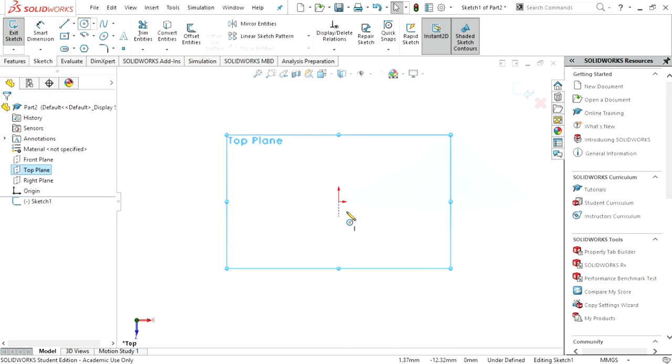So we go here, make sure it is in millimeter. Top plane. Let's start off with a circle first. Go dimension. So that is 56 millimeters.

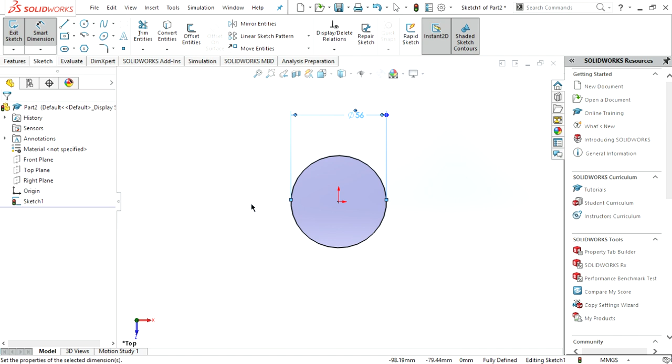56. Oops, never mind, it's not 56, that's just hole. So the whole thing is 75 millimeters. Sorry, 75. 75.

Okay, and then we're going to extrude. Extrude 75. There we go.

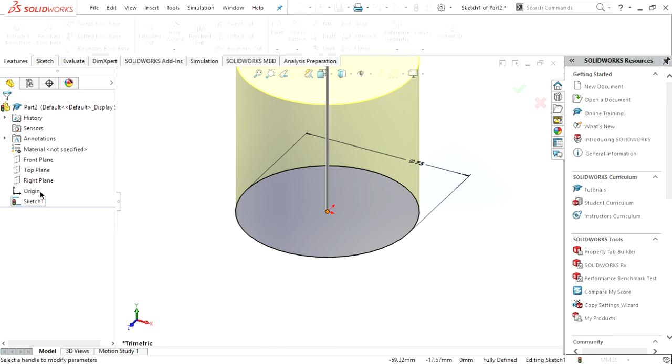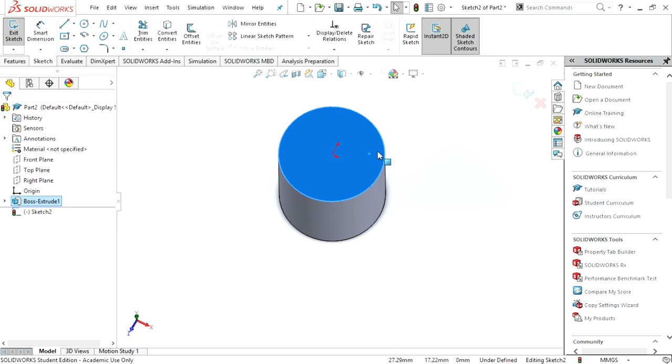Now we're gonna start off with the hole. So click the surface, right click, sketch, not this, sketch, and you press the space bar and this, or you can click this and this. So either way it works.

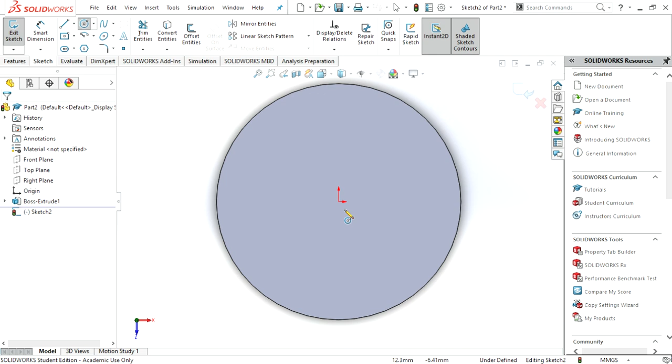So we're going to circle, so let's see what's the dimension. So the dimension for the circle is 56. There we go. Now we're gonna extrude cut.

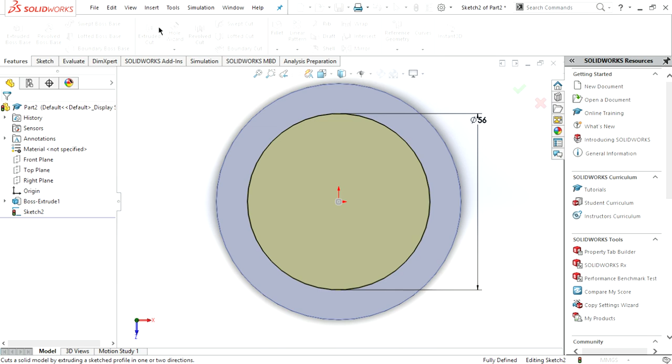We're gonna extrude cut 10 millimeters. So to move around, it is 10 millimeters. There we go.

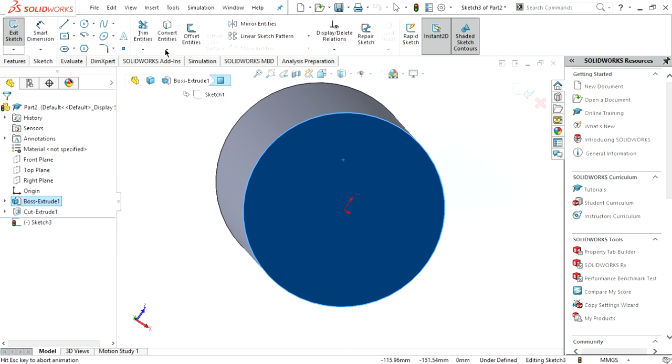And you do the same thing to the other side. There we go. Space bar. Click this. 56. 56. Extrude cut 10 millimeters. Okay.

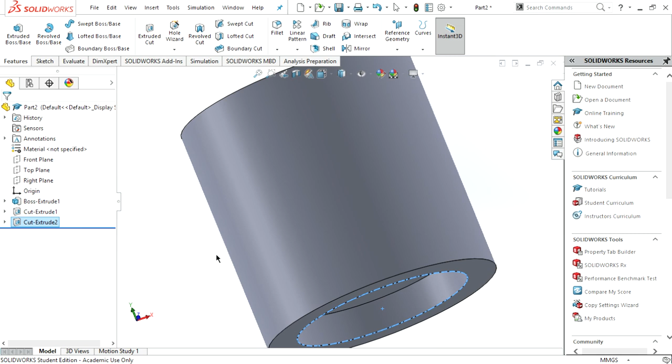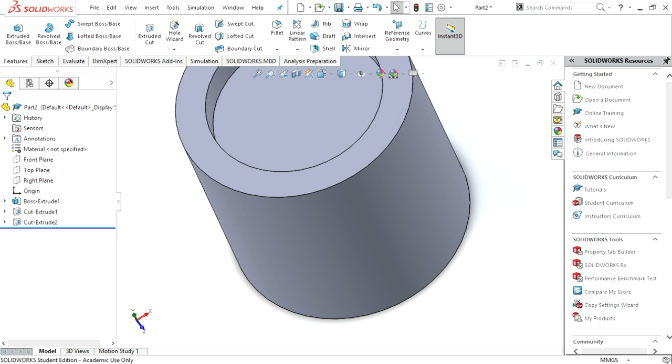Click this, space bar. And that was 38. There we go. Dimension 38. There you go.

And make sure you don't forget this keyhole. So which is 41. So 41 minus 38, which is... sorry, which is 4, my bad. Alright, so, oh, never mind, it's 3. Okay.

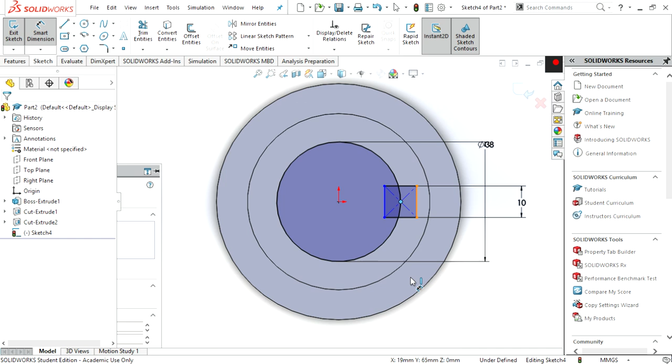So click the rectangle and click the center. There we go. Smart dimension. So this one was 10. And then from here to here it's 3, because 41 minus 38 is 3. There we go.

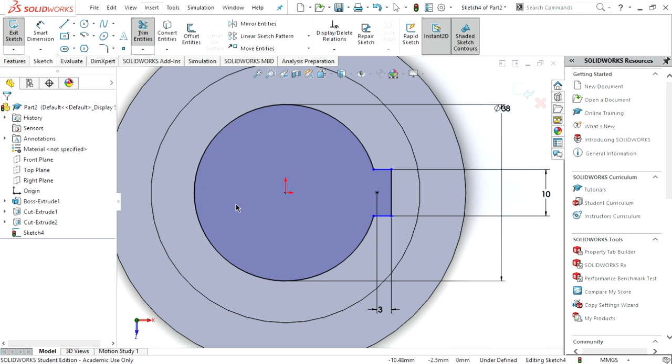And next we have to get rid of this, so we'll do trim this whole thing. There we go. Now, as you can see, this is blue. We don't want blue, so to define, you click this and the center of the circle. There you go.

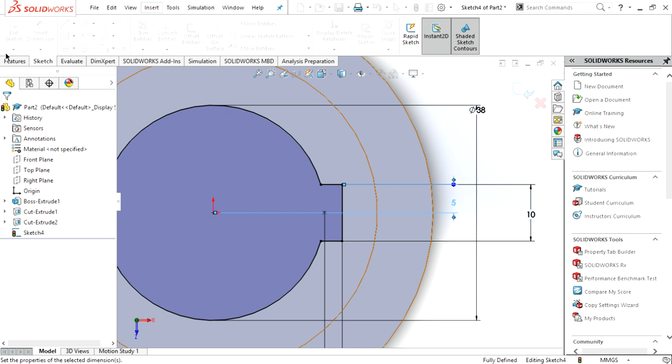And you got your fully defined. And now we'll do extrude cut. So up to surface, and it will be up to here. Click OK. There we go.

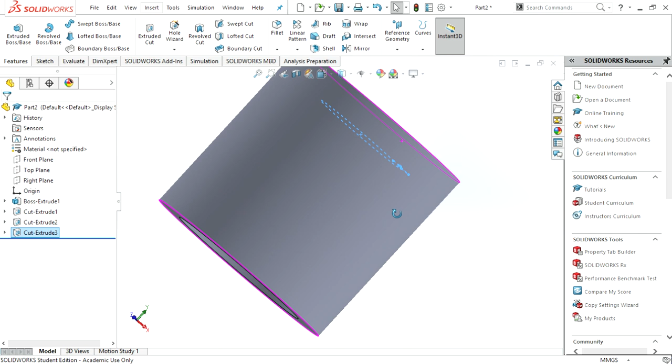Done. So spacebar, let's see how it looks. Click this. There you go. So next we're gonna make this part. So it is 113

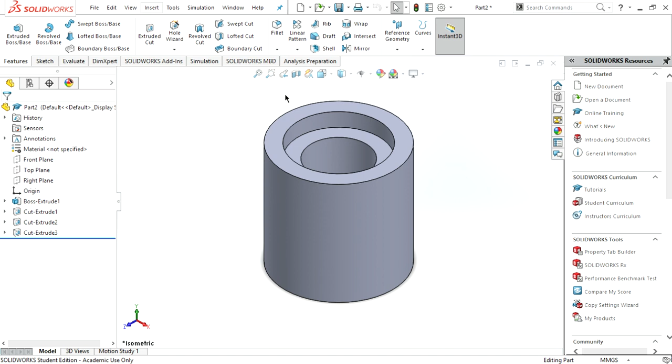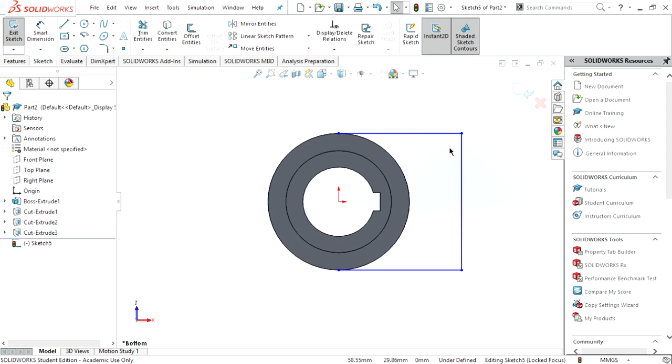millimeters. So we're gonna start from the bottom and make sure you click this. Don't worry about dimension right now. There we go. Make sure you get that hidden lines. There we go. Escape, press escape.

And now it is 113. And this one is supposed to be 75. Why is it not working? Okay. 75. There you go. See, before it was blue, now it's black.

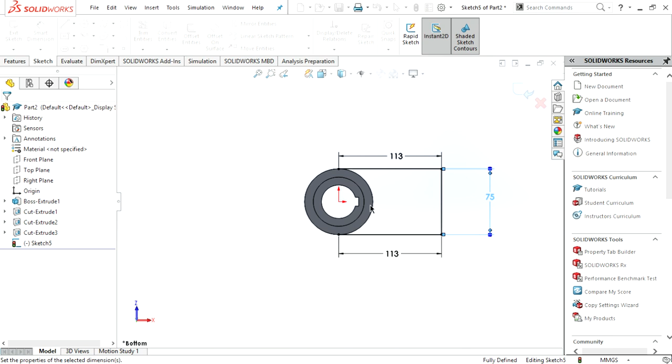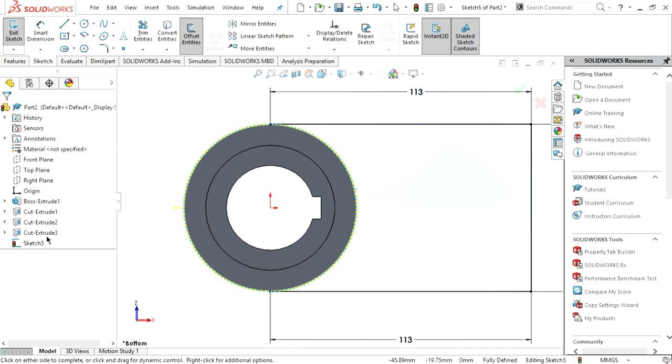And now we have to create this arc in order for us to extrude. So the easiest way is to press this circle, 0 millimeters. There you go. Okay, and you trim this side of the circle. There you go. See? So this means that you can extrude now.

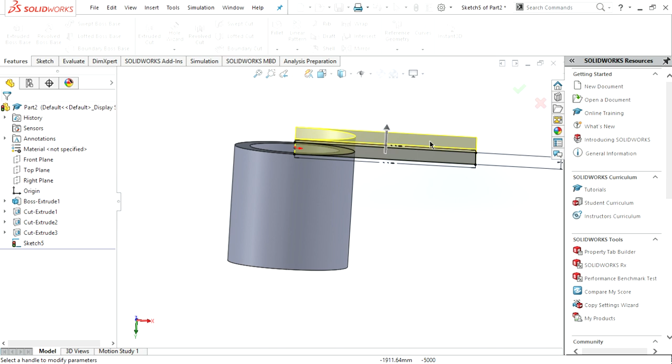So features, now we can extrude this way. Extrude. So as you can see, it's that way, so you just change direction, you press this. See? There you go. And that is 28.

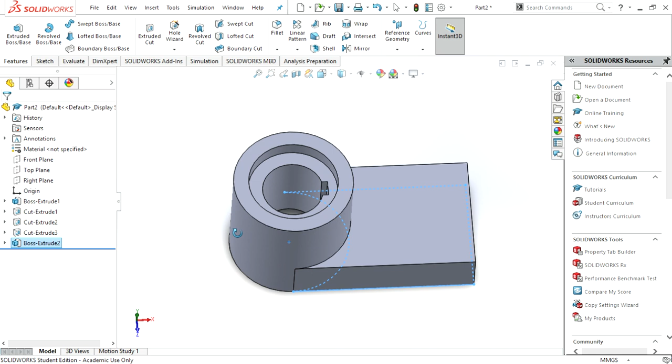Alright, next, we are going to create this whole thing. So press this surface, sketch, spacebar, click this, and now.

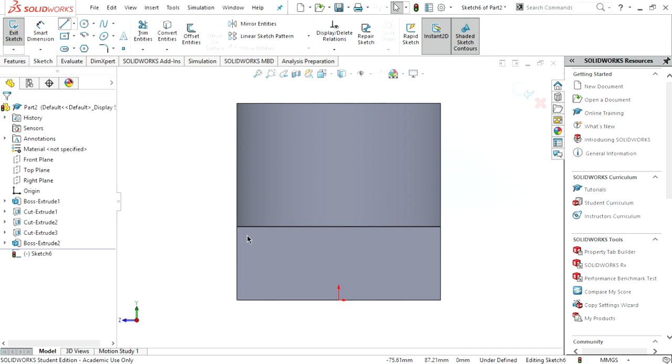So just make a, do this, and that. There you go.

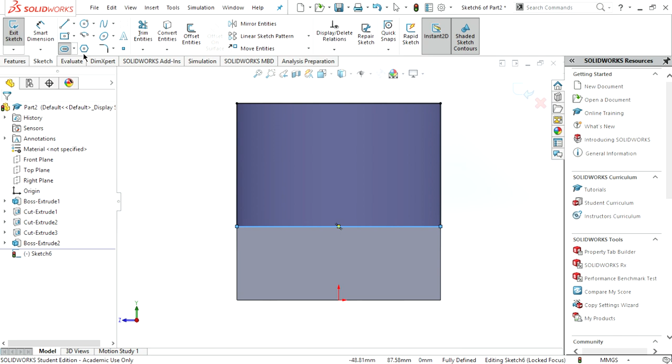And we have to create this as well. So just select this, select the center point, straight slot. There you go. Don't worry about dimension. There you go.

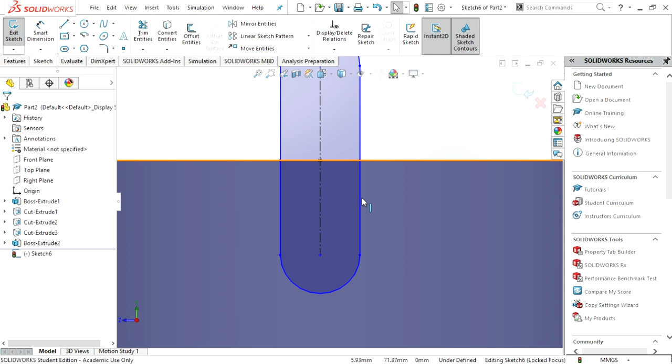Now click, make a line from here to here. Escape. There we go. Now we will trim. Oops. Trim. There we go.

And trim this as well. My bad, you didn't have to create that line. There we go.

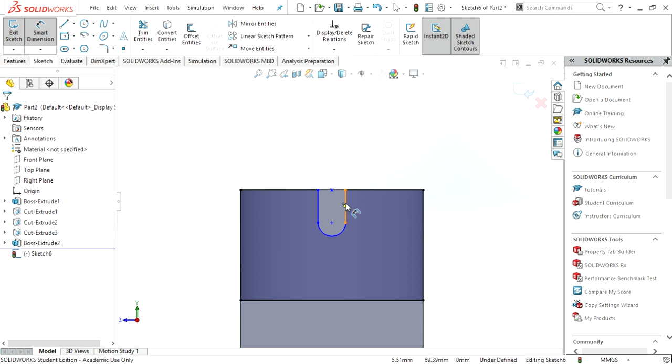So now we will dimension. Make sure this is at the center. So there we go. So from here to here, 19. As you can see, it's not centered.

So to do that is to select this, control this, oh sorry, this, control this point, and you press vertical. There you go. Now it's at the center.

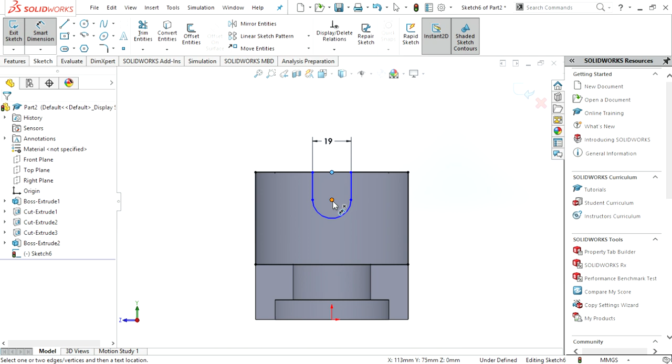So now the height is 20. Oops, my bad. Select this, 25.

Oopsies. Wait, escape. How come this one didn't change? Interesting. Okay. So let's control this, and we're gonna say equal, and now you press 25. There we go. Finally.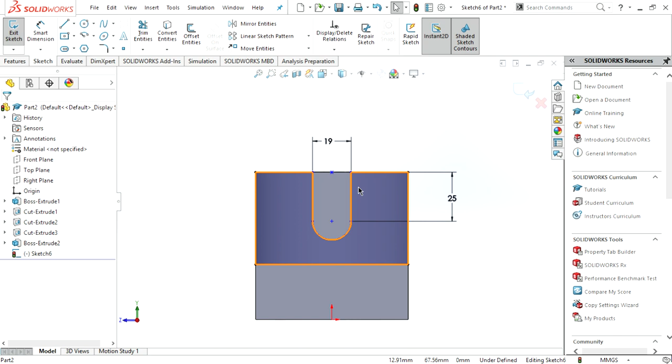Okay, so as you can see, it's still blue. We don't want that, so make sure this is 9.5. Yep, 9.5. There we go. Got black for that.

And then from here to here. Oops, error. So from here to here. Nope. So what you can do is delete all this, because you know the dimensions are right.

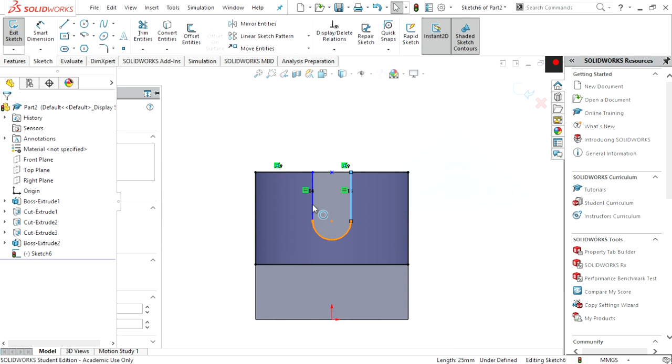Select all the lines. Oops, my bad, not that. Select this, control, there you go, and you can press fully define sketch. There you go. Easy.

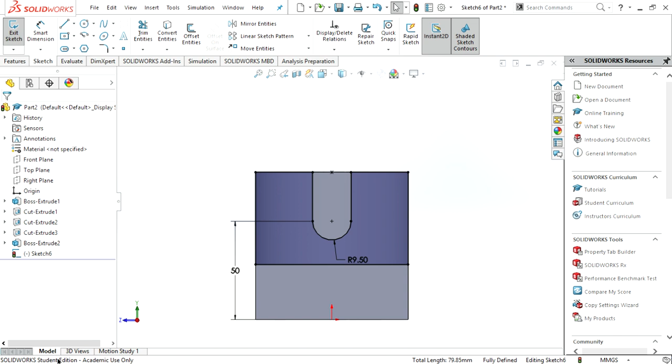So now you can extrude, and we have to extrude up to 28. Change direction. Oh wait, it was, sorry, it was 20, yeah. There we go.

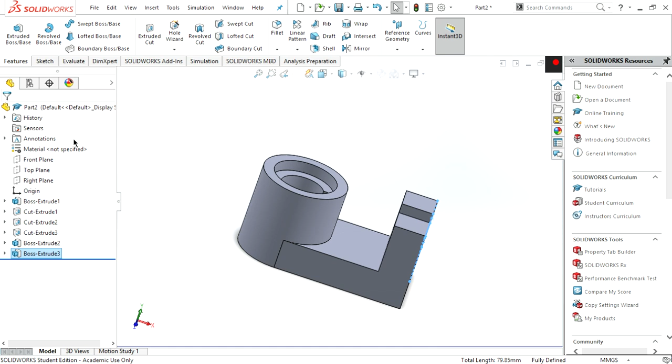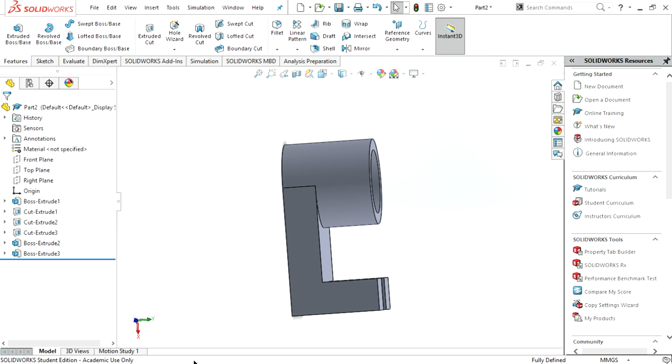Almost done. So now all we have to do is create this fillet, which is radius of 10 millimeters. Let's go back. Fillet. This. Make sure it's done. There we go.

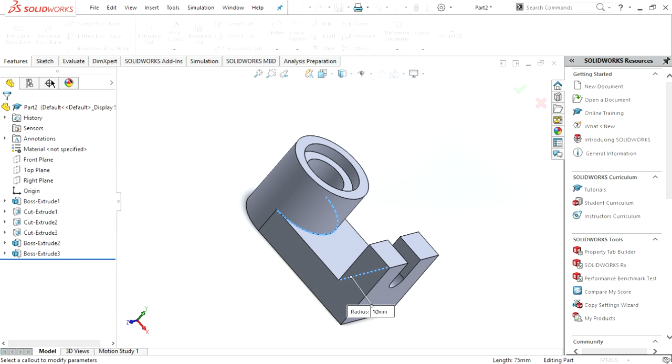And this is the model. There we go. Exactly the same.